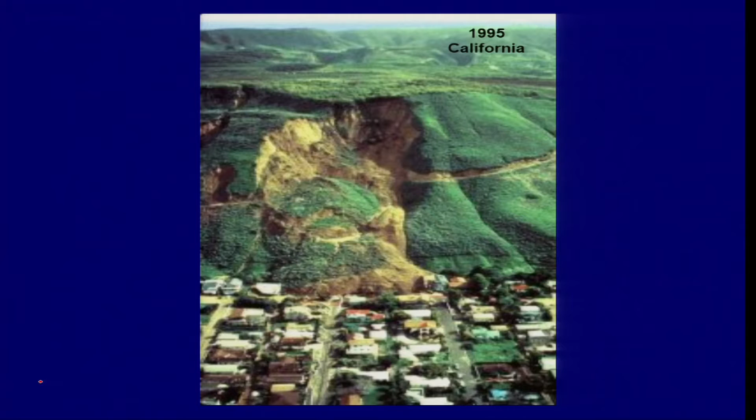Welcome back. Now this is another important topic on landslides, and as I discussed in the previous lectures, landslides are extremely hazardous in hilly terrains. In this topic we will cover the different types of mass movements. I say mass movements because there are a number of different types of landslides and landslips, mud flows - in totality we can consider this as mass movement.

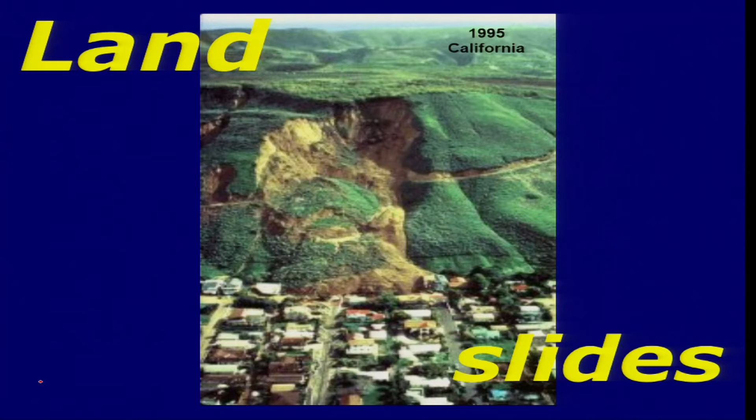So landslide, if we define it, is either a very slow sliding of the material sitting on the slope, or it may move very fast. Depending on the speed of the material, different mass movements have been classified, either as mud flow or landslides. So landslides or mass wasting, we can say.

If we take the definition, it is a downward movement of slope material due to gravity. The material may comprise rock fragments, soil, or artificial fill along a defined or prominent boundary plane.

Movement may be in the form of falling - that's what I was talking about, that it may have different speeds - either it falls, slides, or flows, or we can have a combination of both.

Mass movement mainly occurs on slopes. This is an extremely important parameter - we need slope. If we don't have slope, we will not have any mass movement. It may be influenced by natural processes or human activities. If you interfere with the slopes and destabilize them, you may face landslips or mass movements.

Now, what controls the landslides? What are the major factors that control landslides? Mass movement depends on the balance of forces acting on the slope. If you interfere with or disturb this balance, then you may face landslides.

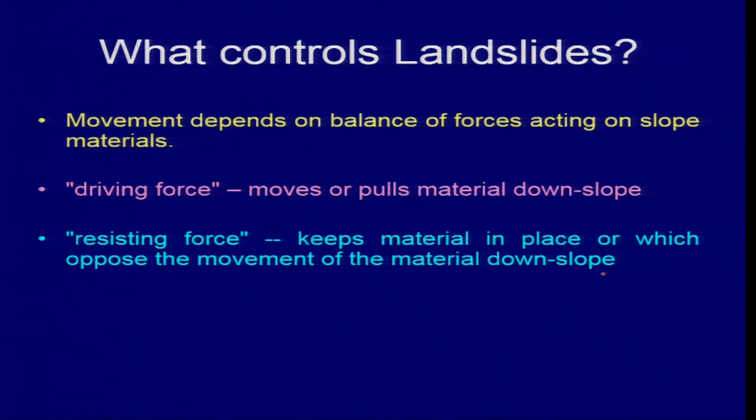One is the driving force that moves or pulls the material down slope, and another is the resisting force, which tries to keep the material in place and opposes the downslope movement. So one force resists the movement, another force pulls down the material, keeping it at the same place.

Driving and resisting force can be increased. Driving force can be increased by an increase in slope angle. So if you vary the slope angle, there are chances of landslides.

Increase in the amount of material - if you are increasing the load on the slope, that can also result in landslide. So it is extremely important that if you have a sloping surface and are coming up with any construction on it, you need to understand whether it may result in slip in the future, because you are increasing the load on the slope.

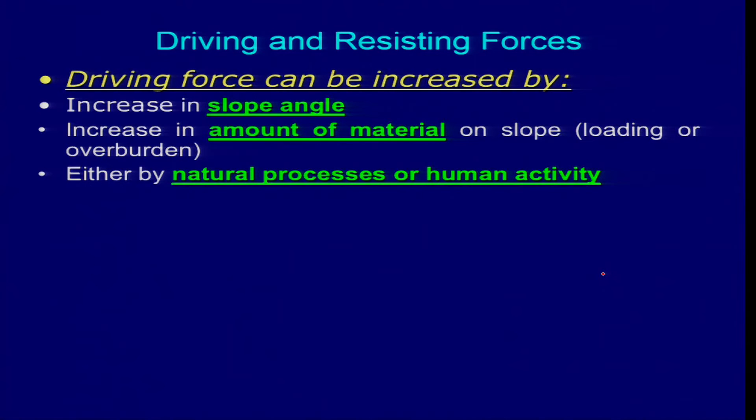This can happen either by natural processes or human activity. For example, turbulent currents in river channels lead to tremendous erosion of side banks along bends, resulting in slumping of bank material into the river channel. This exactly happened during the Uttarkashi flood, as we saw in the previous lecture - there was bank erosion along the bends of the river, which resulted in the collapse of houses sitting close to the river channels.

Decreasing resisting force - so one is the driving force, another is resisting force. What parameters affect reduction of the resisting force? One is saturating the slope material with water. If you have loose material and keep adding more water to it, it may lose its shear strength and result in slip.

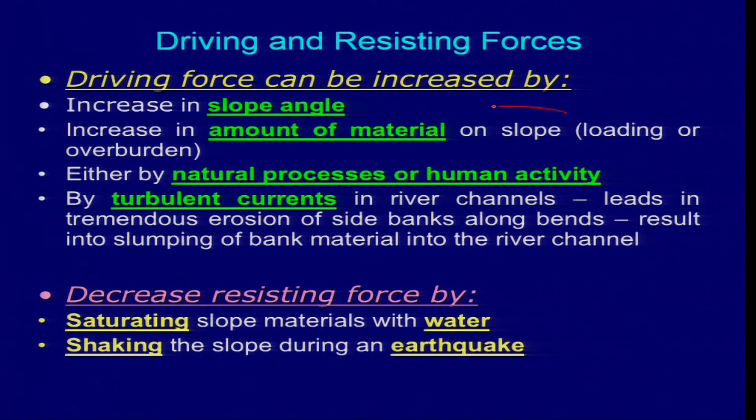And then other is shaking of the slope during earthquakes - this again will reduce or decrease the shear strength of the material sitting on the slope. So we have a couple of important factors: one is slope, then saturating the slope by water, or reducing the shear strength by shaking. Keep this in mind as we discuss this topic further.

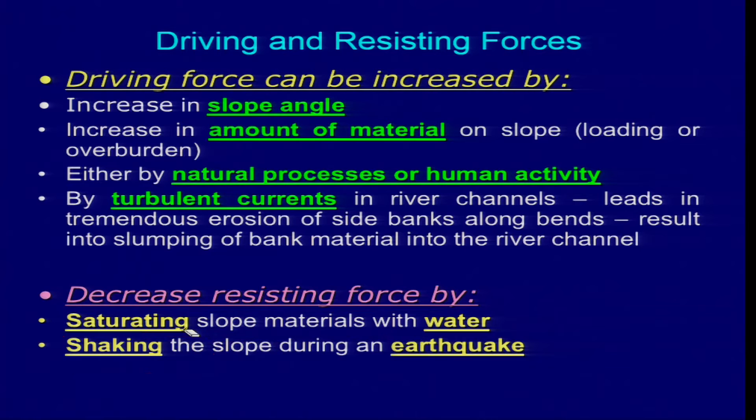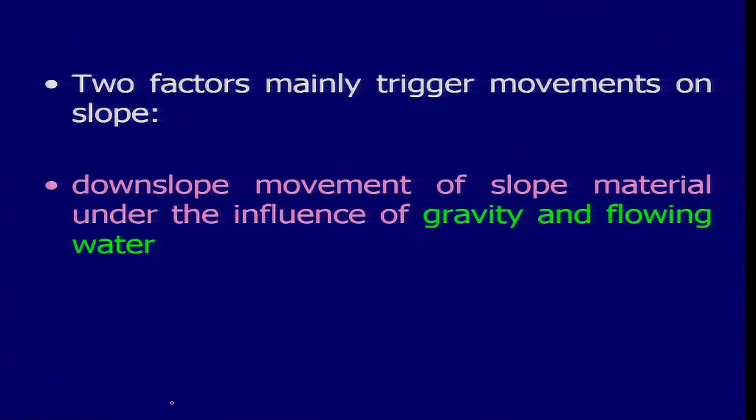So two factors mainly trigger movement on the slope: one is the downslope movement of slope material under the influence of gravity and flowing water. Now, causes of landslide - in total, the main factor that influences slope stability is gravity, and it is responsible for the mass movement.

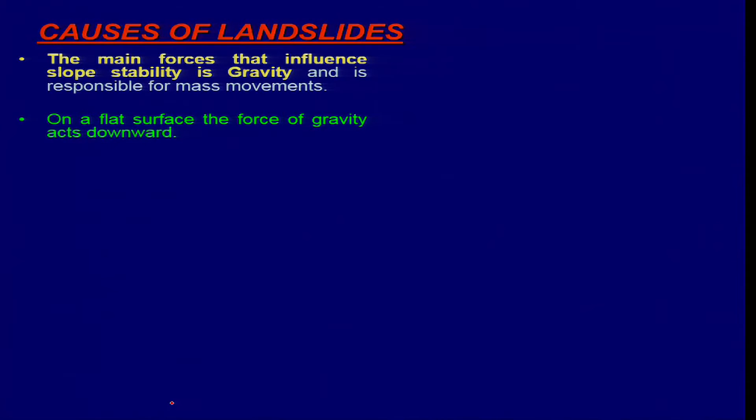On a flat surface, the force of gravity acts downward, so nothing will happen. No movement takes place because your normal stress acts perpendicular to the ground surface, and you have no forces trying to drive this material. Here the gravity equals the normal stress, which equals the gravitational force, whereas the shear stress, the driving force, is almost zero because no slope angle is available. So long as the material remains on the flat surface, it will not move under the force of gravity.

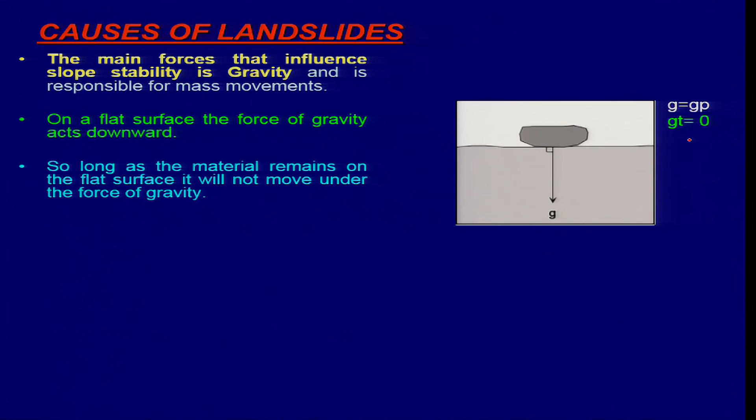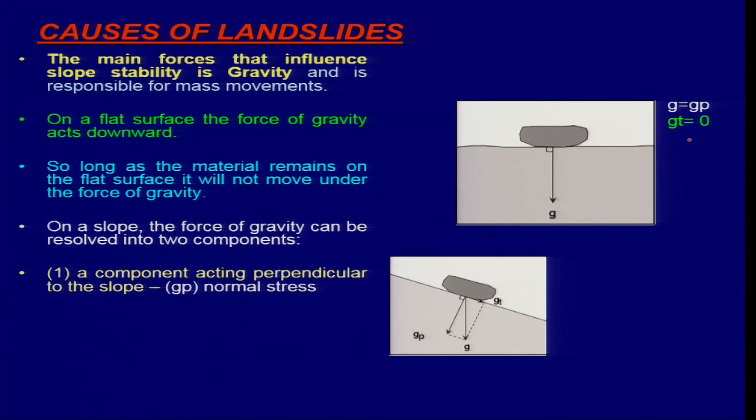However, on a slope, the force of gravity can be resolved into two components: the normal stress and the shear stress. Gravitational force is always perpendicular irrespective of the slope, and this is what we call the angle of repose. If you change the angle of repose, you may result in landslides. Here the normal stress equals the shear stress, so as long as this is in equilibrium, nothing will happen.

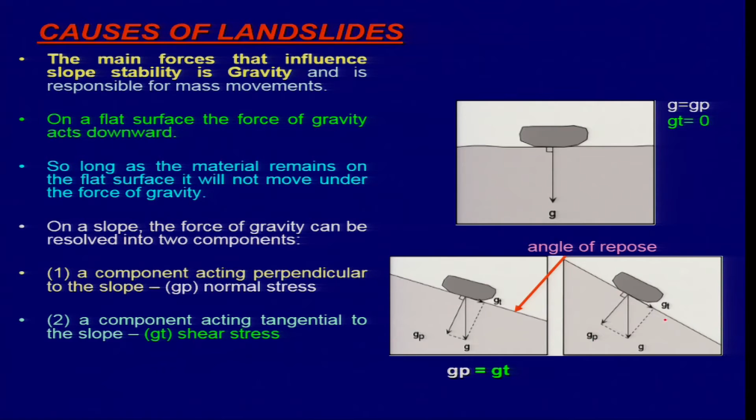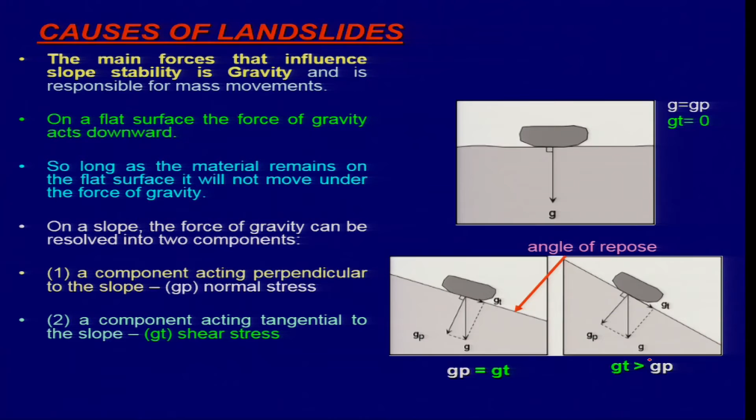All material on the earth's surface has a certain angle of repose, beyond which it will slip if you increase it. So if you increase the angle, and vary the shear stress, and if the shear stress is greater than the normal stress, then you result in a landslide.

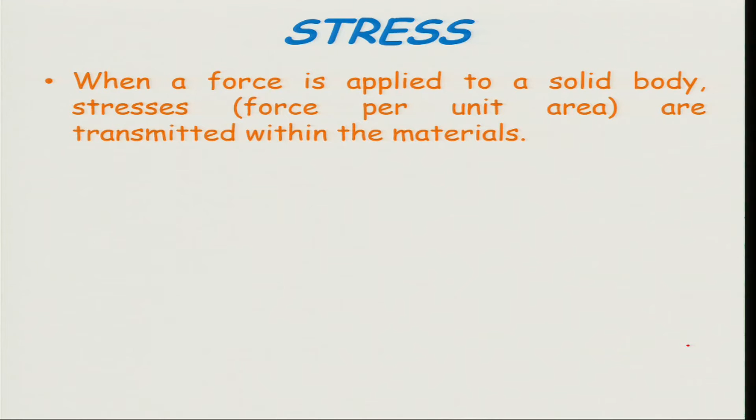In terms of stresses: when a force is applied to a solid body, stresses, that is force per unit area, are transmitted within the material, and we have the shear stress and the normal stress.

Now, gravity imposes a shear stress tau on all the slopes, which you can give with the equation W sine beta, where W is the weight and beta is the angle of the slope with respect to horizontal. The normal stress is W cos beta, where W is the weight of the material sitting on the slope.

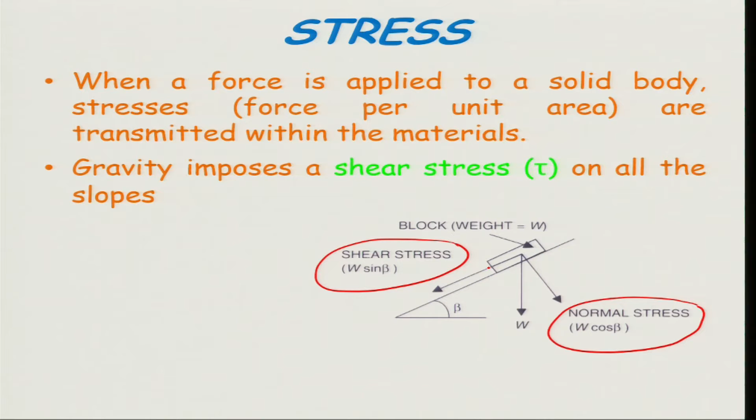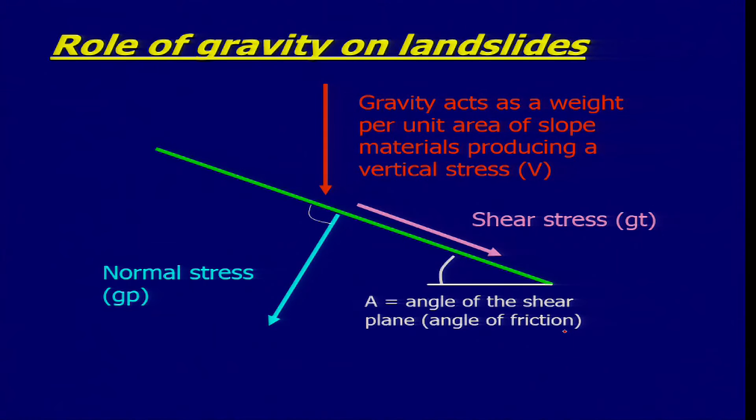Role of gravity on landslide: gravity acts as a weight per unit area on slope materials, producing a vertical stress V. You have a normal stress and a shear stress, and this angle, theta or beta, is the angle of shear or angle of friction. The vertical stress V can be resolved into two components acting at right angles to each other, GT and GP. The relative size of GP and GT depends on the angle, so if you change this angle, the relationship between the normal stress and the shear stress will change.

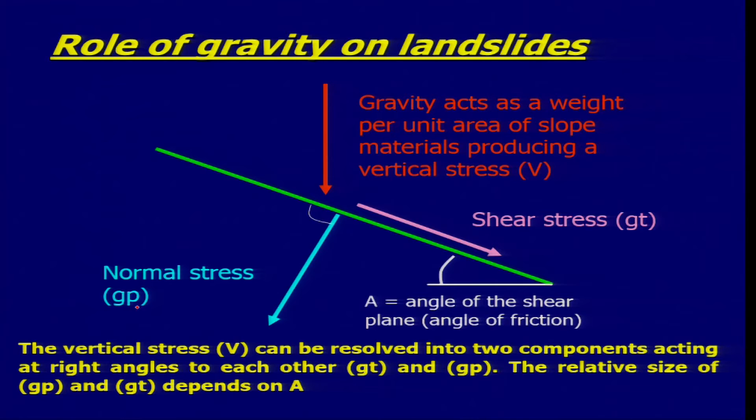Eventually, if you increase the slope angle, the shear stress will increase, and that will result in a landslide. So until GT, the shear stress, equals GP, the normal stress, no landslide will take place.

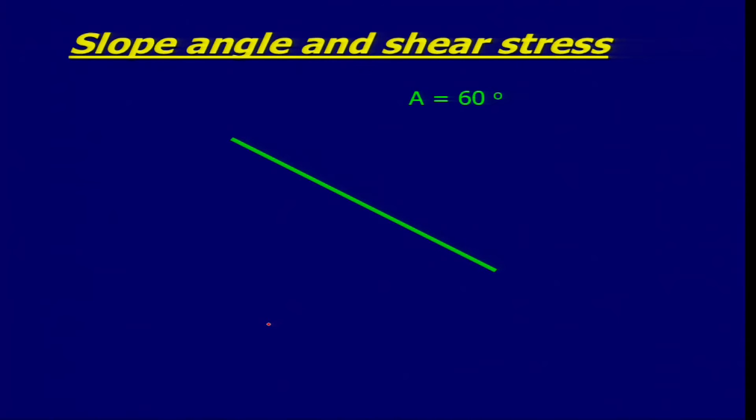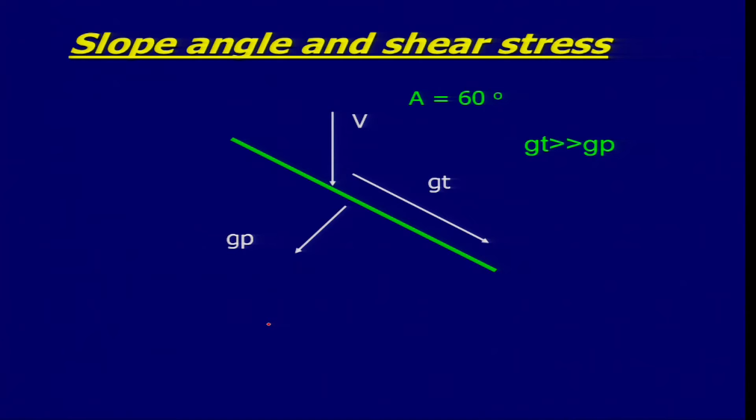So GT becomes large enough to produce the slope failure. In terms of human interference, if you increase the slope angle by excavation, then you may face a landslide.

Water within the slope complicates this simple picture. Even though we keep talking about GT equaling GP for a stabilized slope, in the case where you are putting more water, it may result in a landslide because of the loss of shear strength of the material.

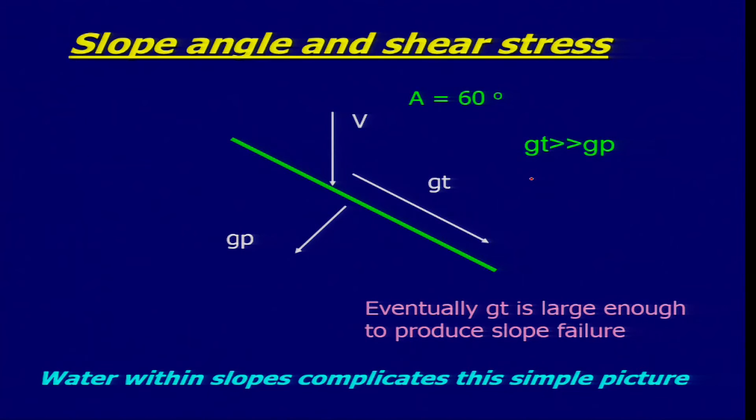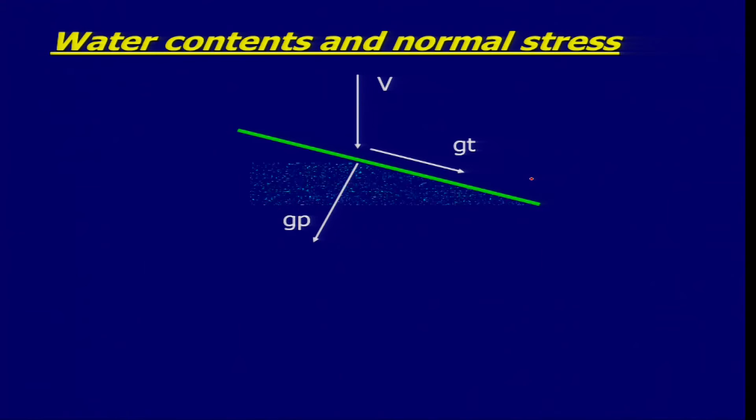Regarding water content and normal stress: why does it happen? Because it results in and gives rise to some buoyancy effect. Water-saturated material results in a buoyancy effect, which changes your normal stress. As soon as the normal stress is disturbed because of the water interaction, it will be reduced, and that is what we call the effective normal stress. As soon as this has been reduced, this will drive the material downslope.

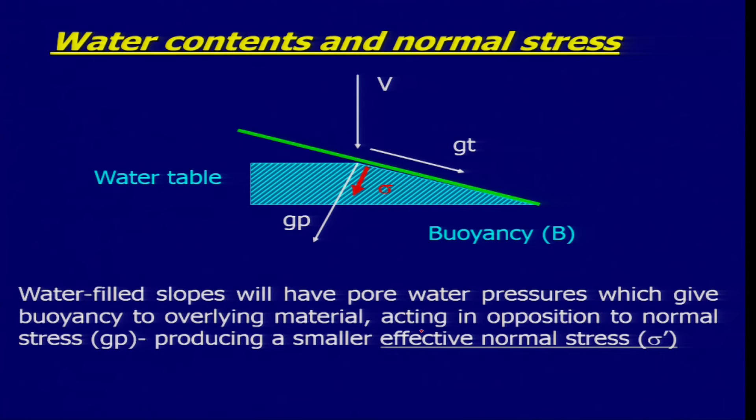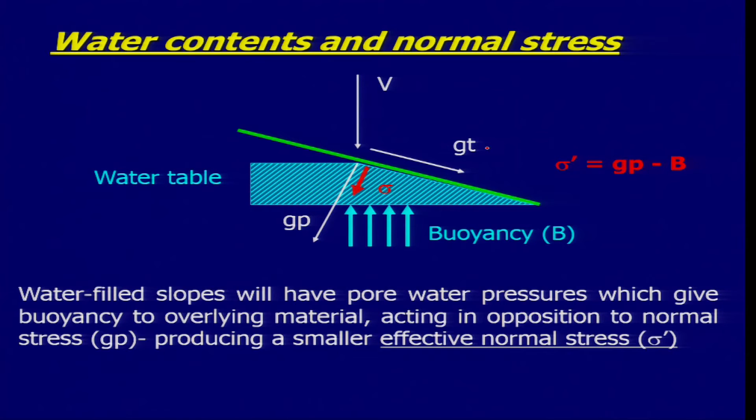A water-filled slope will have pore water pressure, which gives buoyancy to the overlying material acting opposite to the normal stress, producing a smaller effective normal stress. This buoyancy effect results in the effective normal stress, where effective normal stress equals normal stress minus the buoyancy effect. As soon as this has been disturbed, it will drive the slope toward failure.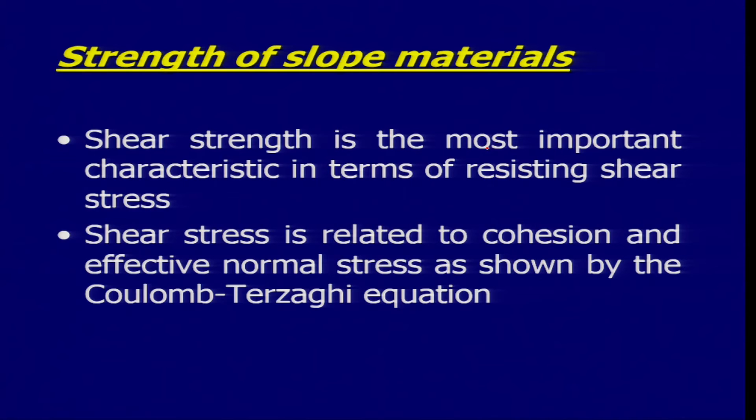Strength of the slope material: shear strength is the most important characteristic in terms of resisting shear stress. The shear stress is related to the cohesion and the effective normal stress, as given by the Coulomb-Terzaghi equation, which includes the importance of the internal friction of the material, including the angle of the slope. So internal friction of the material will be affecting the shear strength.

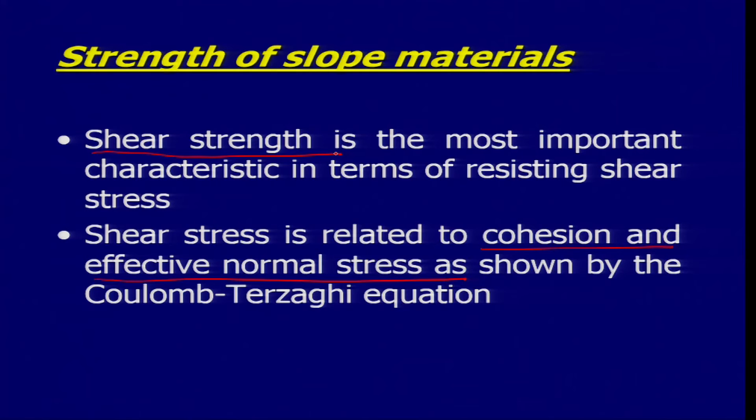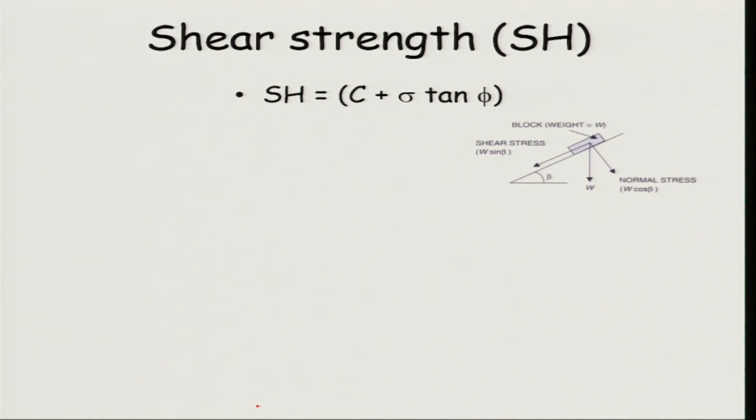For example, if you are having gravelly deposits, sand, or clay, the internal friction will be different for different material. So shear strength, either we say SH, will be given by the Coulomb-Terzaghi equation, where C is the actual cohesion of the material and phi is the angle of internal friction.

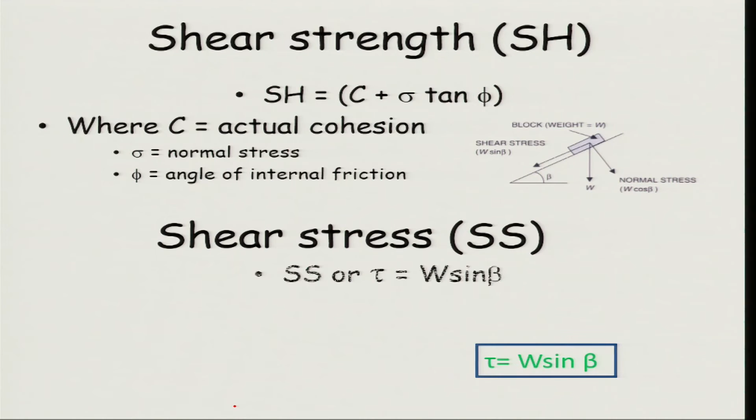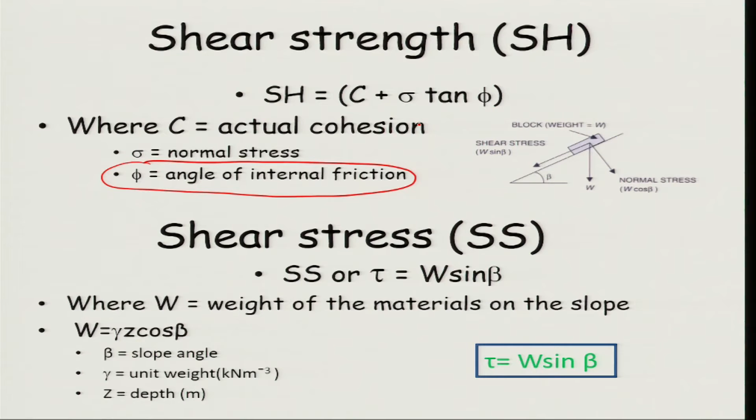The shear stress is given as the weight of the material and the slope angle. So the important part here, as discussed, is that internal friction is extremely important, and this can affect the cohesion of the material. Water can play an important role in terms of changing the shear strength of the material.

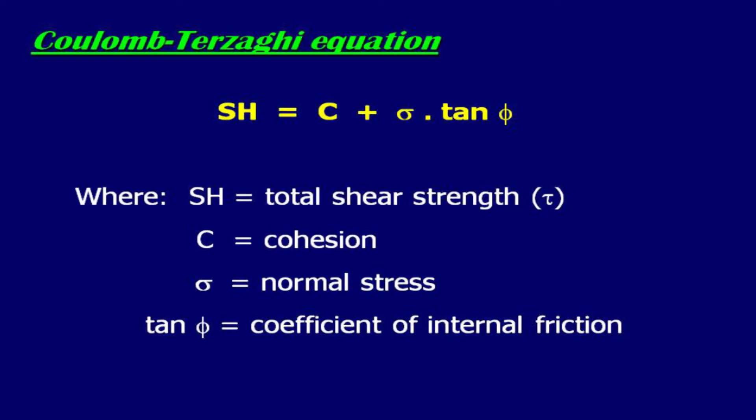So the Coulomb-Terzaghi equation, as discussed in the previous slide, can be given as total shear strength tau: cohesion of the material, normal stress, and tan phi is the coefficient of internal friction. So if you have this information, you can talk about what will be the shear strength of the material.

Now, strength of the material on slope: for example, if we have shear stress and we are talking about the shear strength, then we are interested in the mass of the material, which is extremely important, the slope angle, and then we are talking about the shear stress.

Shear stress is given as W sin beta, where W can be further classified as mass into gravity, in Newton per kg. So if the weight is, for example, 500 kilograms and the angle of slope is 30 degrees, then weight is 500 kg into the acceleration, which is g, giving the weight as 4,900 Newton.

So shear stress will be your angle into the weight here, that will be around 2,450 Newton. Whereas shear strength, as we were talking about, will depend on the cohesion and internal friction, that is SH, where we are talking about the cohesion and the internal friction of the material. Total shear strength: cohesion, normal stress, and tan phi is the coefficient of internal friction.

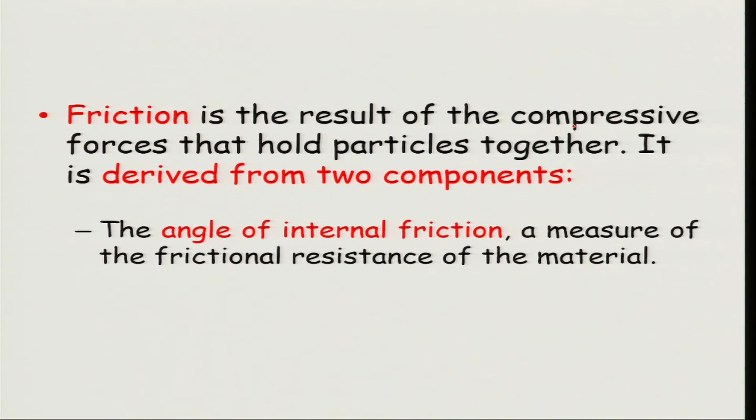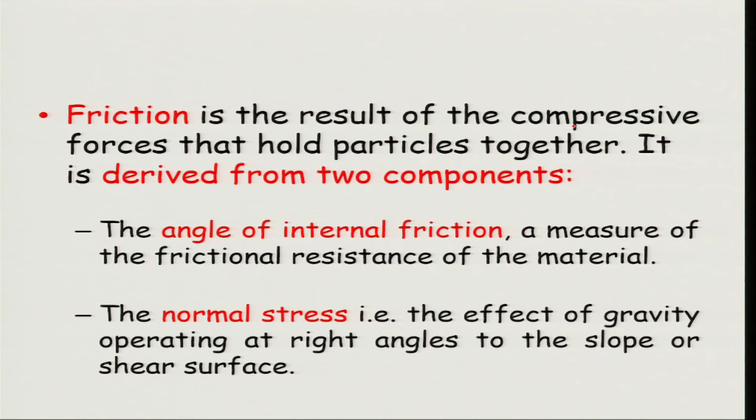So friction is the result of compressive forces that hold the particle together. It is derived from two components: the angle of internal friction, which is a measure of frictional resistance of the material, and the normal stress, which is the effect of gravity operating at right angle to the slope or shear surface. So these are the two components.

As slope increases, normal stress decreases. So under seismic loading, because we were talking about two factors, either we reduce the normal stress because of adding more water to the sloping surface or the material sitting on the slope, or because of the ground shaking. So under seismic loading, triggered by earthquake ground shaking,

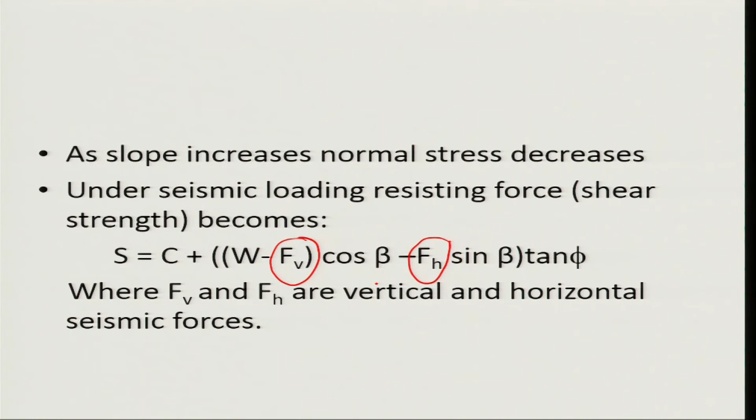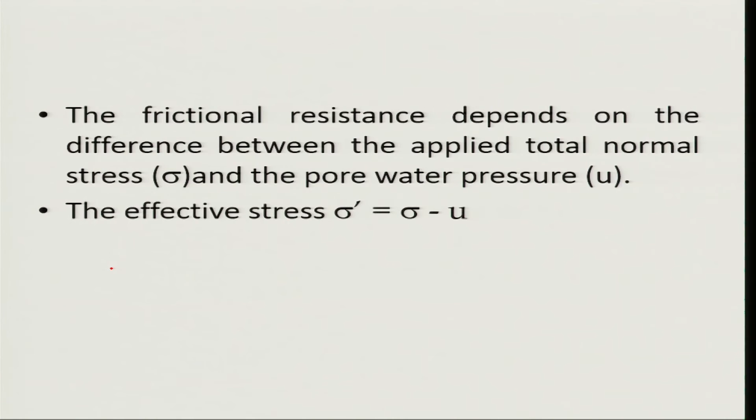The frictional resistance depends on the difference between the applied total normal stress and the pore water pressure, as discussed in one of the slides before, and that will be your effective normal stress or effective stress. So this is your normal stress and this is your pore water pressure.

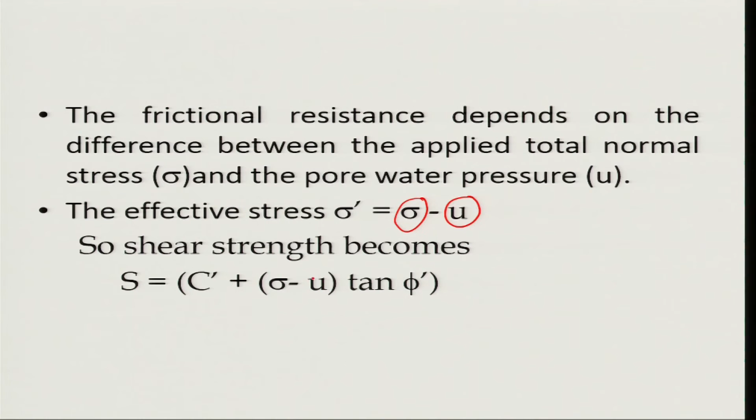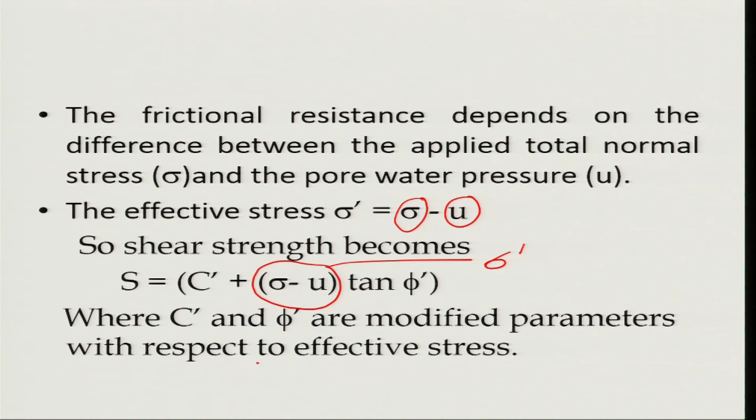So shear strength becomes modified when you are putting in the component of pore water pressure. This will be your sigma prime, and of course the internal friction will also change, where C prime and phi prime are modified parameters with respect to the effective stress.

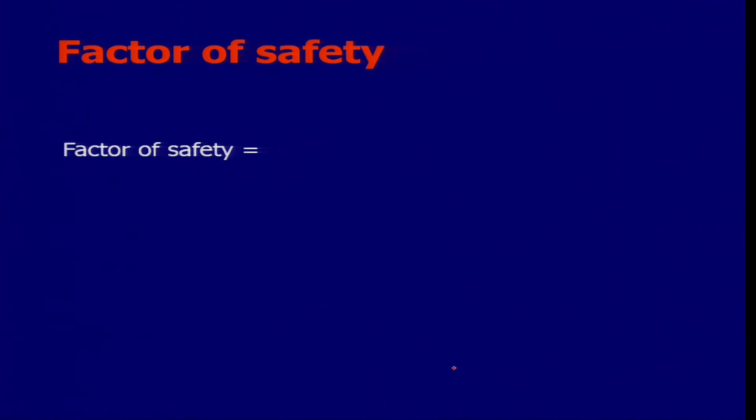This is important in terms of when we are talking about the factor of safety. Factor of safety has been given as shear strength divided by shear stress.

So, if you take the normal Coulomb-Terzaghi equation, we have this equation which will give us the factor of safety.

Where the factor of safety is greater than 1.3, the slope is stable. Where the factor of safety is less than 1, the slope is actively unstable. Where the factor of safety is between 1 to 1.3, the slope is conditionally unstable.

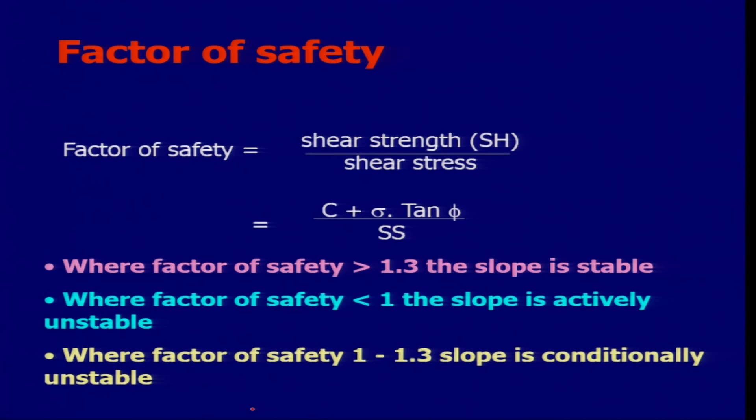So, what is extremely important for us are the parameters which we have discussed in previous slides, that is the normal stress, will be extremely important when we are talking about the material sitting on the slope, and if they are getting saturated by water, or if we are changing this parameter because of seismic loading.

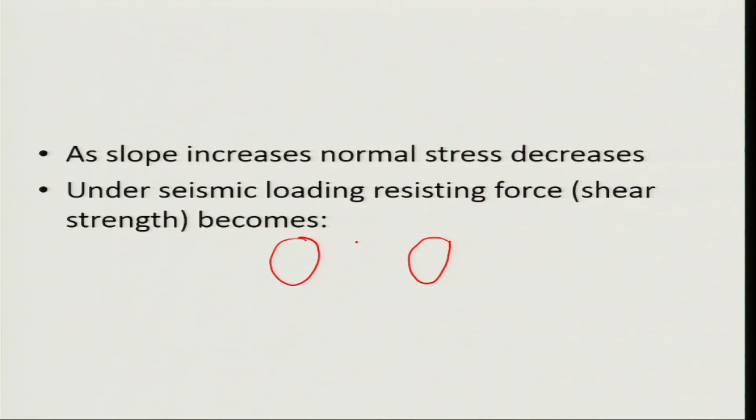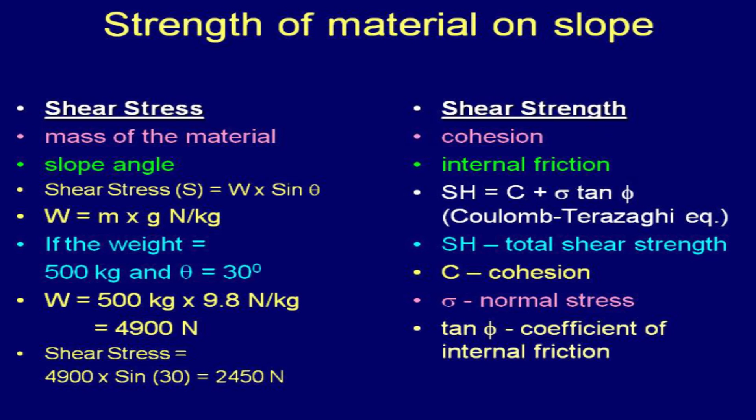And this will depend upon the shear stress, which will depend upon the weight and the slope angle, whereas here we are talking about the shear strength. So, where we incorporate the cohesion, then we incorporate the internal friction of the material and the normal stress. So, this one has to keep in mind when we are talking about the factor of safety.

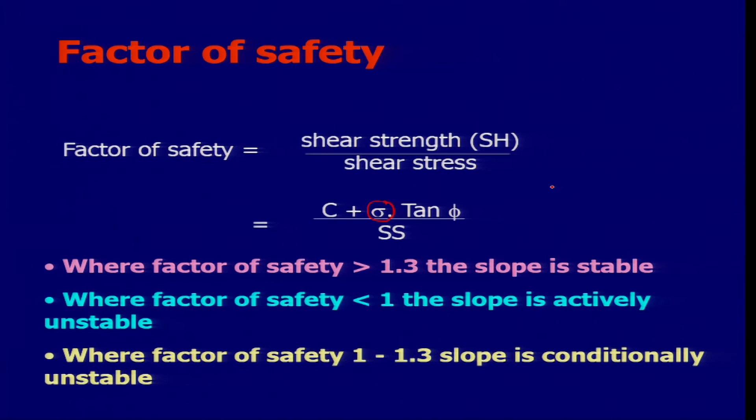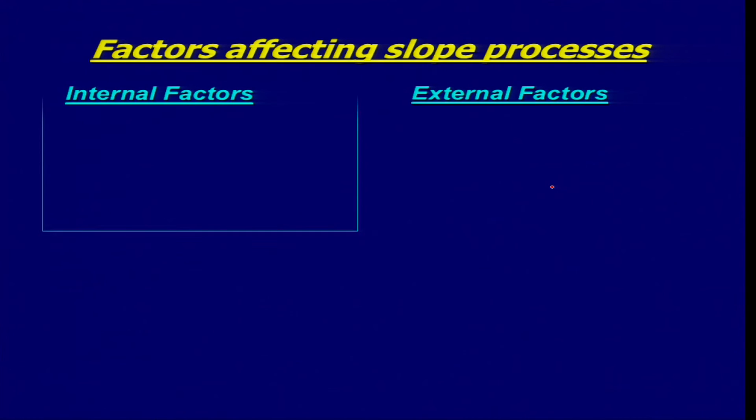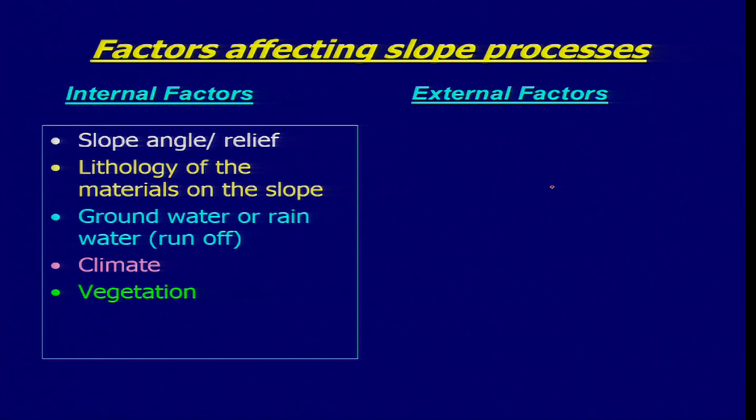Factors affecting the slope processes: internal factors and external factors. Slope angle or relief, lithology of the material on the slope, groundwater and rainwater runoff, then climate - in which area the slope is present, and what type of material is there.

Then of course the vegetation, then geological structures. Then external forces: earthquakes, tectonic activities in the areas, volcanic activities, human influence, which will destabilize the slopes. So, these are all factors. It is not the one single one which will act upon or affect the landslides, but there are several.

So, please keep in mind the parameters we talked about in terms of shear strength and shear stress, which includes the slope angle, the internal friction of the material, the groundwater which will affect your normal stress, and of course the climate, because this will be extremely important in terms of precipitation.

Vegetation to some extent will hold the slope, and then geological structures - if you are having faults and fractures, that eventually will affect the shear strength of the material. Earthquake will result into seismic loading because of the strong ground shaking. Volcanic activities, as we were talking in the introductory lecture, can result into the landslide.

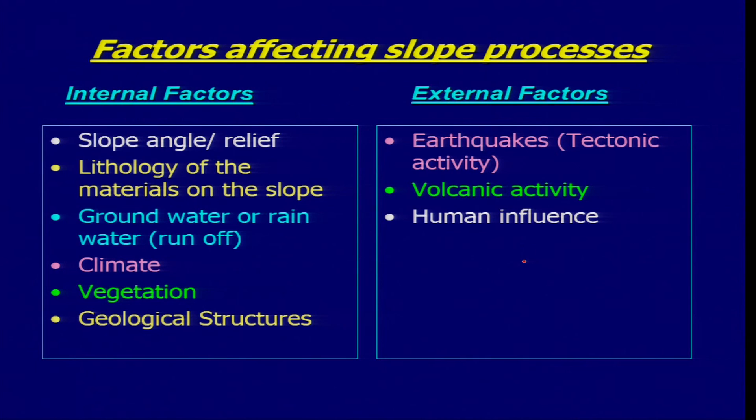And the human influence - if we reduce or excavate the material from the slope, or we are overburdening the weight on the slope, increasing the slope angle can result into the landslide. So, these are two factors, internal and external factors, which will also affect the slope processes.

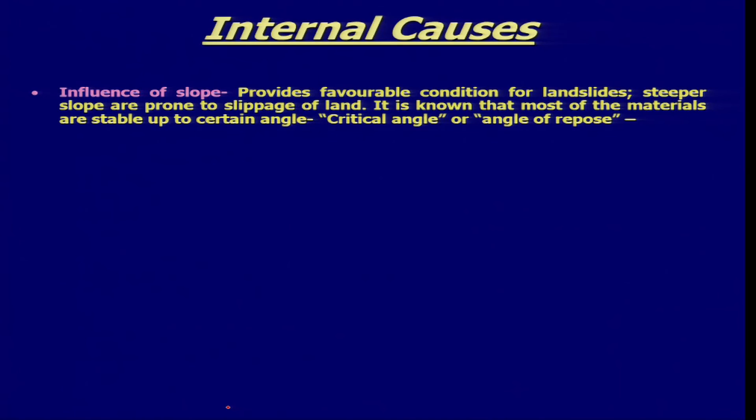So, internal causes - influence of slope provides favorable condition for landslide. Steeper slopes are prone to slippage of land. It is known that most materials are stable up to a critical angle, that is the angle of repose. For example, it varies from 30 degrees for unconsolidated sediments - so if you are having loose sediments, it will remain stable until 30 degrees - up to 90 degrees for massive rocks, and for jointed rocks it is up to 60 to 90 degrees.

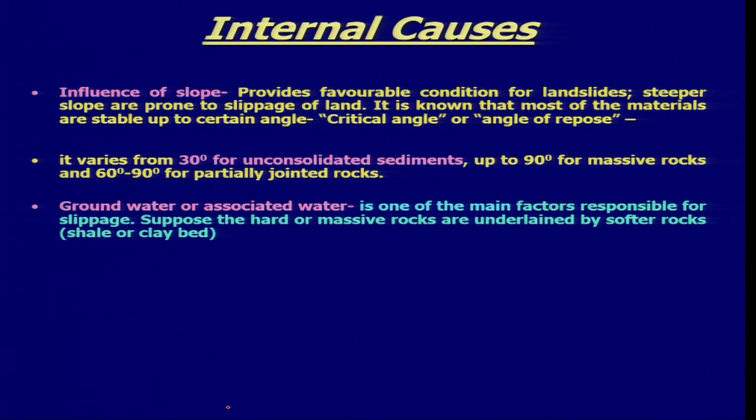So, groundwater or associated water is one of the main factors responsible for the slippage. Suppose the hard or massive rocks are underlain by softer rocks like shale or clay beds - they have different shear strength. So, if you are having massive rocks sitting on the surface, that does not mean that area will not slip, because you are having a softer material with comparatively less shear strength, and it will eventually decrease the normal stress when you are pouring more water on the slope, and if it becomes oversaturated, it will result into the mass movement.

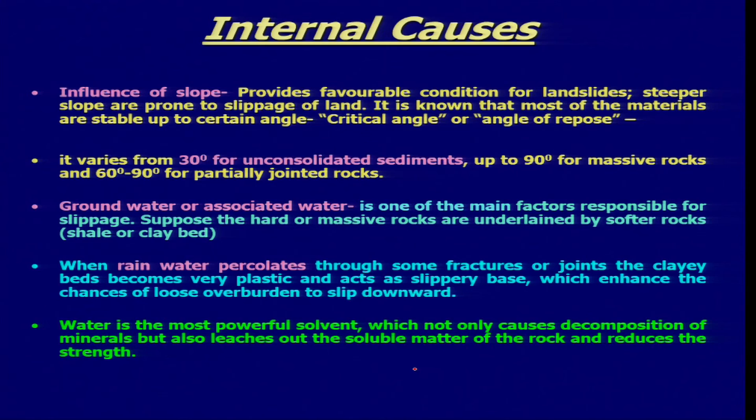So, when rainwater percolates through some fractures or jointed regions, the clay beds become very plastic and act as a slippery base, which enhances the chances of loose overburden to slip downward. So, you have affected here the normal stress of the material on the slope. The holding forces which were acting before the percolation of water are changed. So, water is the most powerful solvent, which not only causes decomposition of the minerals, but also leaches out the soluble material of rock and reduces the strength. So, this will reduce the shear strength of the material.

So, along with the slope angle, what type of material is on the surface is important. So, for example, lithology - if we take into consideration rocks which are rich in clay, montmorillonite, bentonite, mica, calcite, gypsum, etc., are prone to landslide because these minerals are prone to weathering. So, we will discuss this part again in the next lecture.